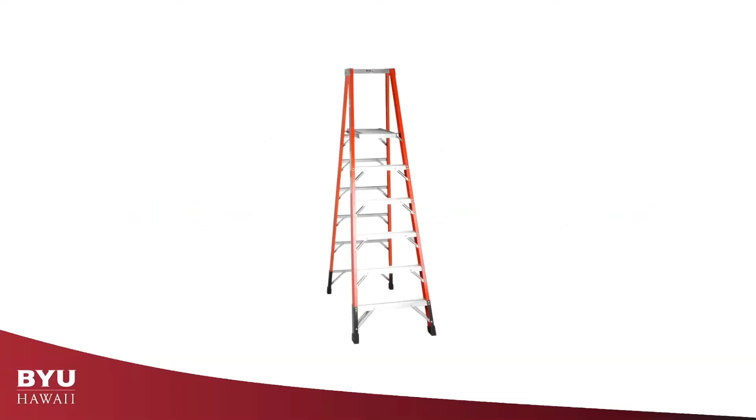So I'm going to start this with the question: what is the most dangerous tool at the workplace, whether you're in facilities or in construction? What is the most dangerous tool out there? I will show in the next slide what it is. Think about what you think it is. The most dangerous tool in facilities and construction is this: it is a ladder. Anytime you have somebody that has to go up and down a ladder on a roof to look at something, that's cause for problems. There's actually a push with OSHA to see if they could do away with most ladder use because of so many problems with the falls that happen.

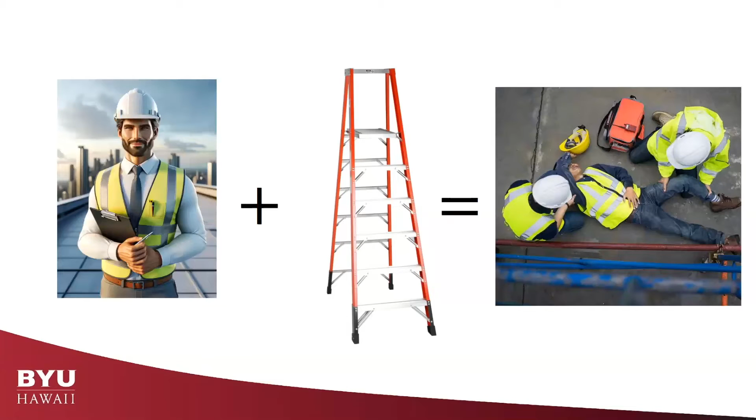So I put together this slide. That guy on the left is my AI inspector, facilities person. And just a side joke, I uploaded a picture of myself and said, draw a picture that looks like me as a building inspector. That is not how I look, by the way.

I don't look that good, but all right.

So from a safety perspective, this is from the Department of Labor: 38% of construction fatalities come from falls. When you fall from a roof, it's very likely to be fatal. Anything above 11 feet, and there's a good chance you could die from that. Just adding up the cost for a fall, you break a leg, you're looking at up to $60,000. We did some research on that - $60,000 for recovery, rehab, loss of work. And that's from one fall.

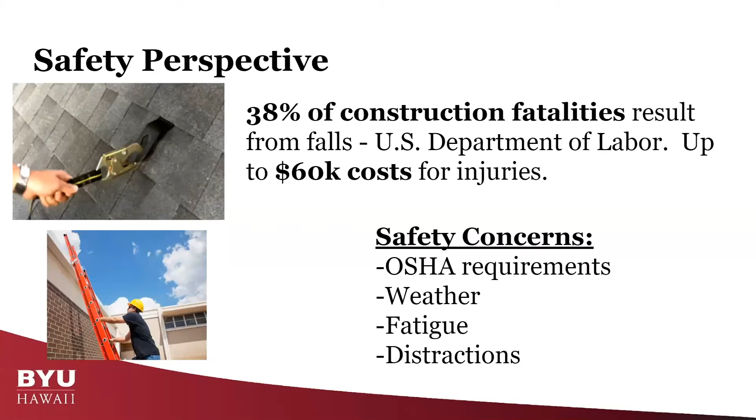So if nothing else, drone use is helpful to avoid falls. Other safety concerns are weather, fatigue, and distractions while you're climbing up and down, traversing a roof.

Let's see, some things I wanted to point out. Obviously safety is an issue - put down the numbers there for that. Another thing is time savings when you use drones. We did some research there too - what's the time savings versus going up yourself or sending someone up there?

You can document buildings better, your structures or your property. You can do it by date, by GPS tracking. Also, you can do maintenance planning with this. So I'm going to go through that.

Some of those points - let me just talk through getting started. I'm assuming that maybe you've never worked with this before, and I know several of you may have, but never worked before. I'm just going to walk you through some basics and then show you a bunch of different examples of how we've shown that it can be used.

Now, before I move further, I'm looking at the chat line. Let's see, checking here. Jake, I'm going to let you look through that. If there's any questions that need to come up, feel free. Yep, I'll keep an eye on it.

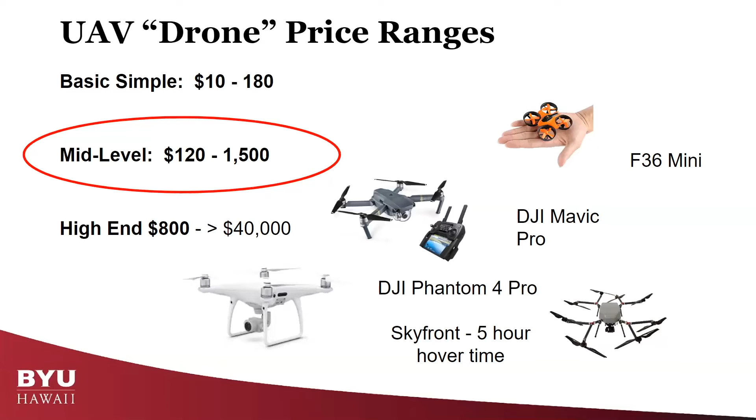Okay, great. So getting started though, price range for drones - you can go simple, mid-level, or high-end. What we recommend is about this range for most drone use in industry. I'd say stick closer to the $1,500 range. They've got great cameras, decent battery life. You can go higher end, these $800 to $40,000 drones, but if you're looking at expenses and you want something quality, you can get something decent for $1,500.

The FAA license - it is work, it takes some time. I put together a list of things that are on the typical test for it. It's about $170, almost $200 to take the test. And it's like a lot of other tests - they'll let you test 2 or 3 times off of the fee, but you do need to study. I tracked my own study research - 12 hours is what it took me. Basically I watched a bunch of YouTube videos over and over, people that walk you through the test questions.

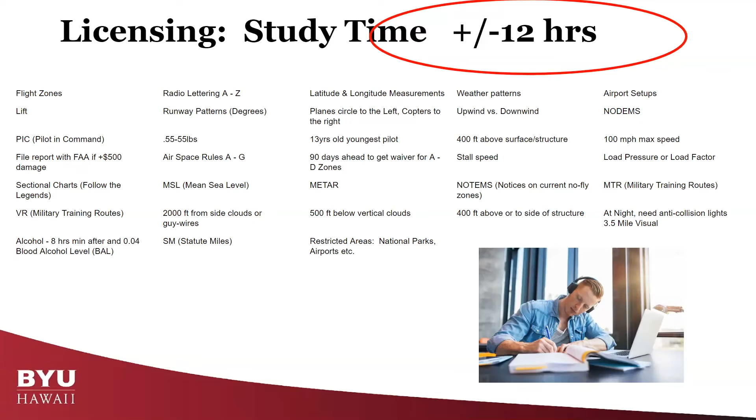Anything from the age to fly drones, learning about what NOTAMs are, stall speed, METARs - a lot of information. Alcohol and drones don't mix, things like that. A lot of information that may not be what you use day to day, but they do deal a lot with safety there. So that's just a quick list of the questions there. I'm sharing these slides with Jake so you can share those with people in the future.

If you get the license though, what does it do? It lets you fly commercially, charge money for it, or at the workplace. You understand the laws of safety, regulations, which is great. What it does not do - it does not make you a good pilot. Getting your license doesn't make, it's not like a driver's license where you have to prove yourself in driving a car. It just gives you a piece of paper. It does not teach you about industry software, things like that.

So let's move on. Now, if you're going to fly drones, you think you're going to jump into it - the key is practice, practice, practice. I'm going to go through some examples of how I practice.

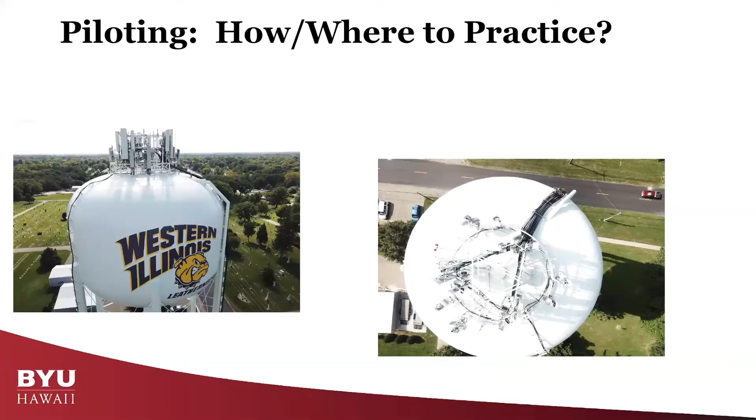Anyway, practice. This was our local water tower in the Midwest, Illinois. Got up, checked around, got close enough that I could check the welds on the tower. This obviously had a cell tower on it, and I was probably across the street, maybe 300 yards away.

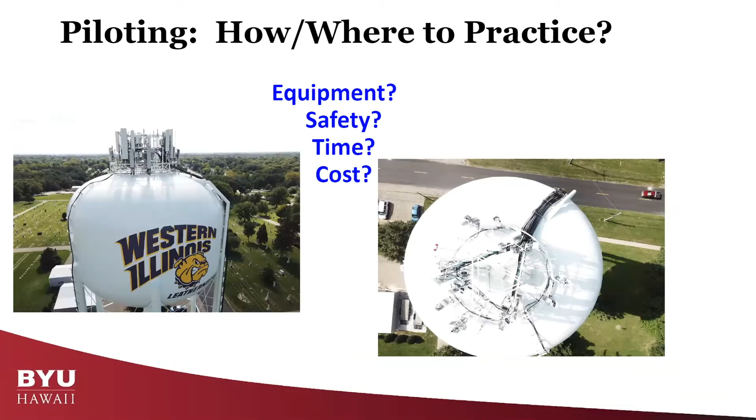But on these pictures I'm going to show you, I want you to consider what it would take in terms of equipment, safety, time, and cost to get these pictures without a drone. If you were to get up there with a helicopter or ladders, what would it take?

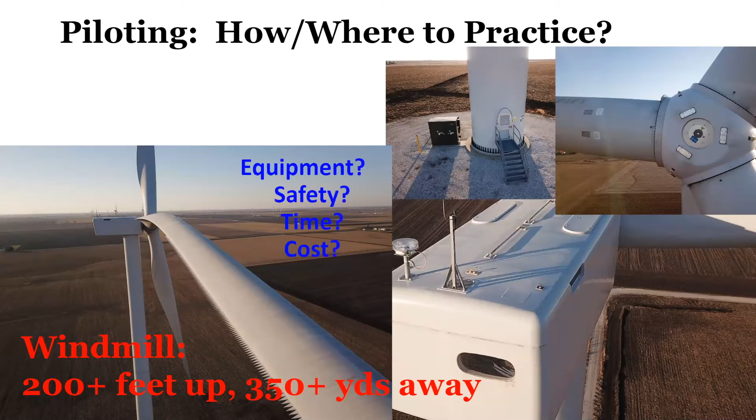But I was able to take this up in a few minutes, 350 yards away, take it up and bring it back to get pictures. Again, equipment, safety, time, cost - what does it take to get these inspected?

By the way, talking to that guy doing the inspections, he said that partway up some of these, his leg would start to cramp up, and then you get into trouble climbing that ladder.

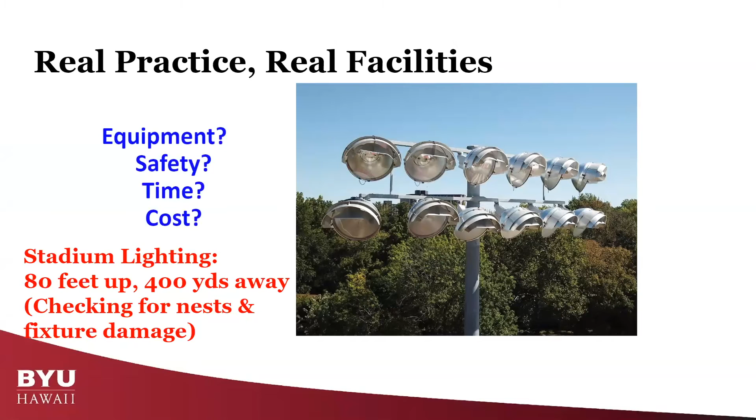Here's another example on campus, checking the stadium lights. In this case, I was just looking for nests, hornets nests, things like that - 400 yards away, 80 feet up, checking that. So again, how do you get these pictures or this inspection done

without compromising safety? One of the things I learned as I started moving along with drones is there are 4 main settings on any drone that you need to learn: focus, white balance, ISO, and shutter speed.

Really what you're just trying to do is make the pictures easy to see, so that when somebody puts it on their computer, they can see it clear. I came to Hawaii about 6 months ago, did a great drone inspection of the town I was in, took it back to Illinois, opened everything up, and it was all blurry.

So focus - make sure you get your focus right. White balance, ISO, and shutter speed - you can Google these, look them up, there are great trainings on them. They're just settings on your drone that you need to learn how to use.

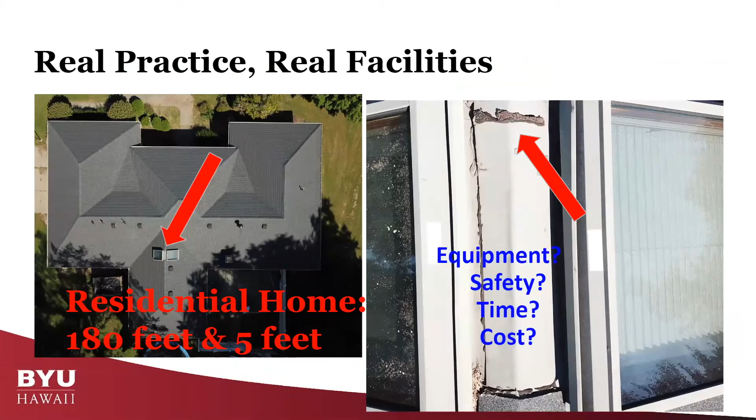Residential is an example - actually it was my house in Illinois, showing a close-up and a faraway picture. Again, what would it take to get these pictures inspected without the use of this technology?

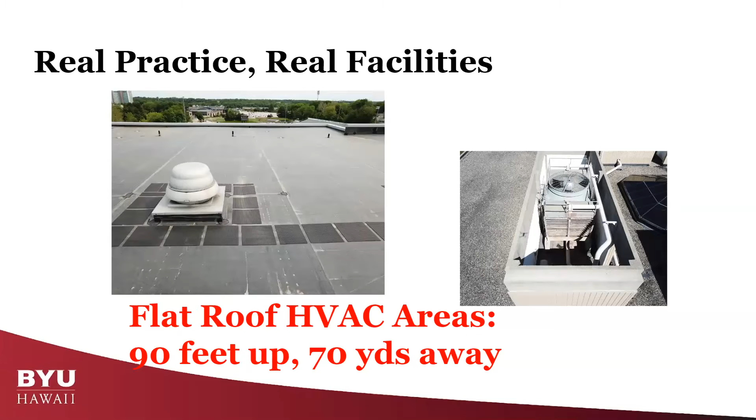Some of our buildings on campus, drones. The key thing we learned was you need to check any penetration, anything poking out, a parapet wall or vents. You need to get various angles of them to be able to show the condition.

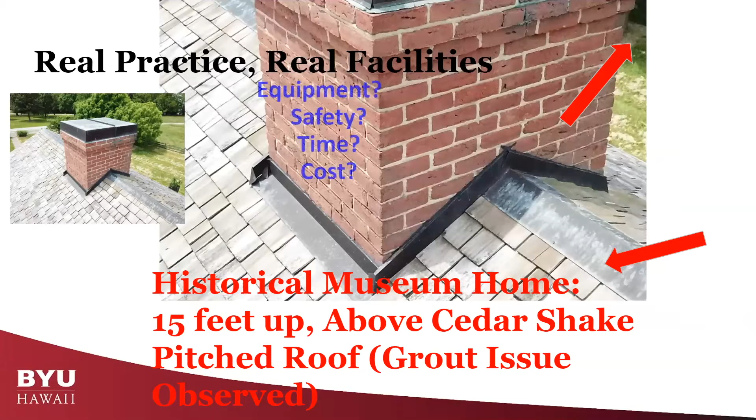Are there leaks? Are there cracks? This was another client we worked with - they had a lot of historic buildings. You can see these cedar shake roofs, checking for leaks, checking for damage or wear on them. This group had over 100 buildings like this. So what would it take to do that?

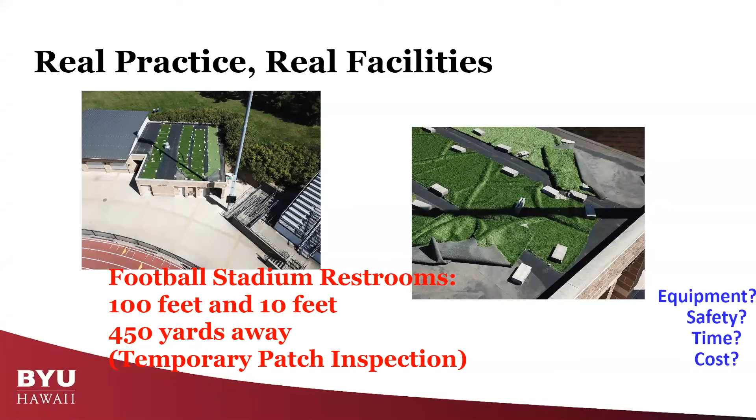So we developed several protocol steps. When you do any building, you make sure you get an overhead view, take a short video flying around it, and then get angular views, take an angle picture of all the penetrations, get as close as you can. Sometimes the client will say, hey, can you take a picture of this part? We have this one part of our roof got torn off, get some close-ups of that. We've got hornets here. So a lot of things that you do over and over. These are the steps we did with some research presentations on this.

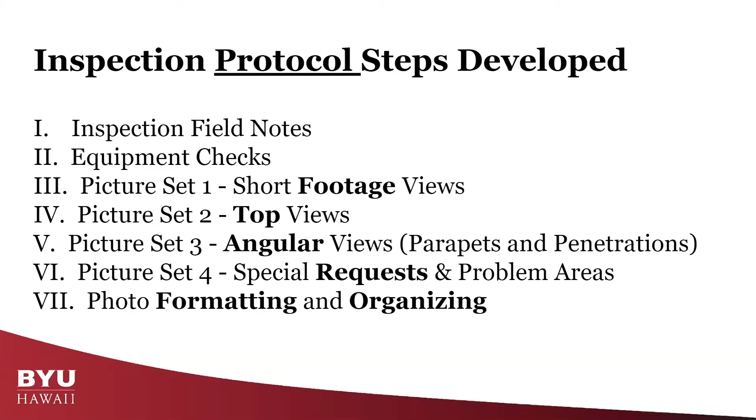And then step number 7, formatting. That is a big part of getting this all organized, keeping it organized so that you can view it later. That's done at your desk.

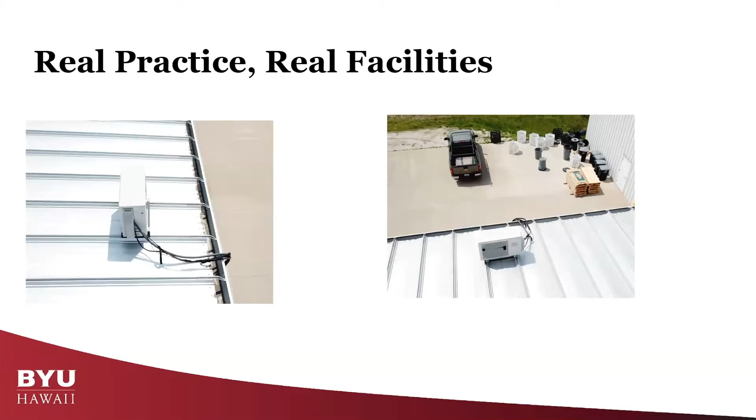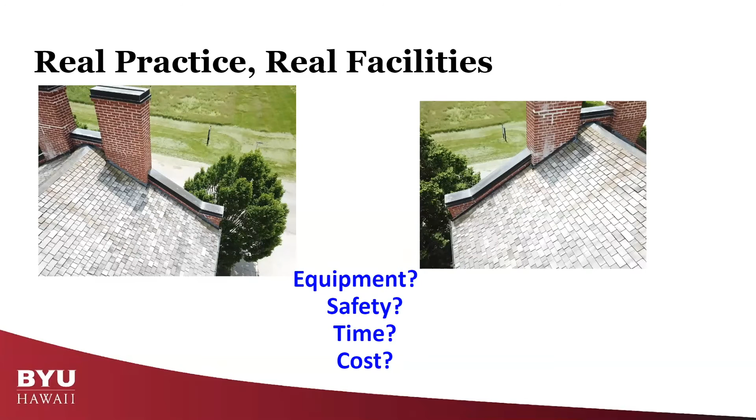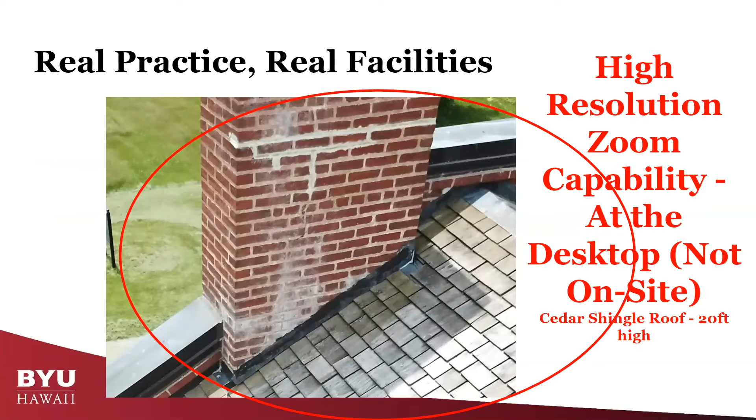So these are a couple more pictures. There's an AC unit on top of a roof, getting it's part of a roof inspection. So a few more pictures I'll show. This one just shows how close you can get. Take the picture from 40 feet away, but when you put it on your desktop, you can get it close enough so that you can see if there's any issues with the mortar, the grout, the flashing on the roof, the cedar shakes. So if you check in quality there, really nice opportunity to see these up close.

Each building, by the way, took us with setup and takedown about 10 to 15 minutes. So pretty quick. In one day, I could get 20 plus of these structures inspected following that protocol I talked about.

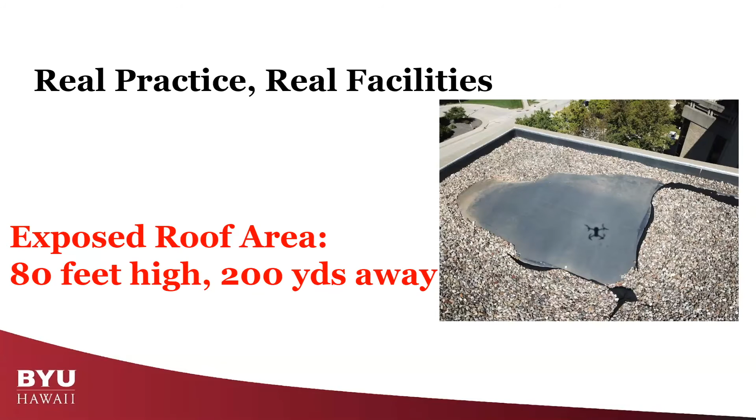Here's another example, our library. You can see one section, they looks like they did some work there and then forgot to rake back the rocks, which should have been covered back up.

This is another example, student housing. I'm using a lot of examples from our university. I had a pretty good relationship with our facilities person there. They had an issue with the student housing, the dorms, where about every spring, middle of spring, and then middle of fall, they have these bats and hornets that would just come out on the buildings. This is about a

15-story building. And so rather than doing some high-end angle pictures, all I did, hopefully you can see this all right, I flew the drone looking for holes or gaps in the roof. So took the drone, fly up, stop, fly up, stop.

What we found, it was hard to see from the ground, but let me pause right here. This is about the third or fourth floor up. Between the windows and the brick, we found that there was a gap, that the seal had broken or come separated. And so all along, third, fourth, fifth floor up, you have this gap that was coming through, and the bats and hornets, they'd go in there and just make their home in there, which caused all kinds of problems for the students.

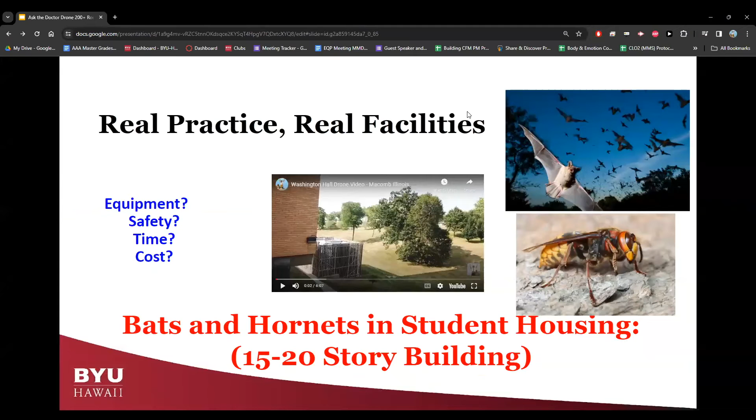So that was an example of helping to solve a problem. Let me get back up to here. And right there, okay, helping to solve a problem of what's going on, how are these hornets and bats getting in? Again, how would you get these pictures taken without some technology like this?

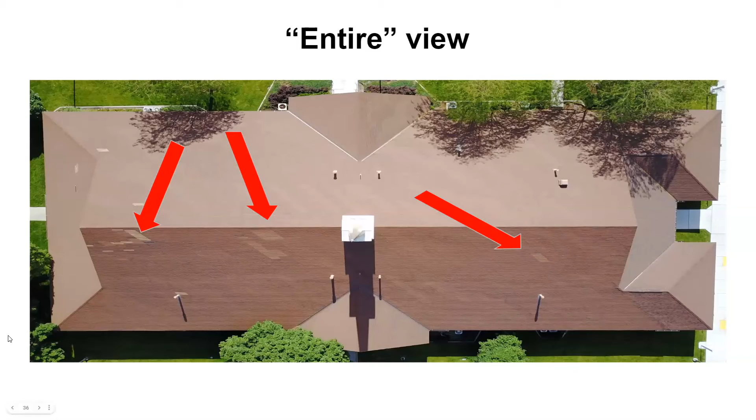Here's another example of a large building. In this case, it was a chapel. They're looking to re-roof, and they have to decide, is it time to re-roof or can we wait? You can see, obviously, with the drone pictures, this particular research was done by Dr. Bowen, one of the initiators on this work that I followed. You can see areas of the roof that are damaged, but they're not sure if it's time to re-roof. They get the drone out, take pictures of different sections of the roof.

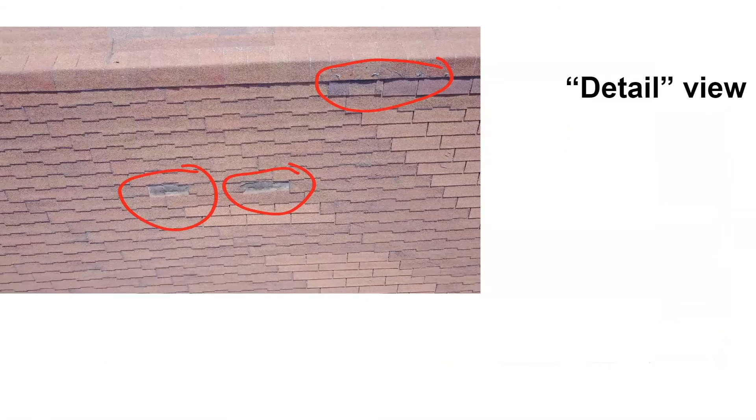Then they get up right close. They can see that there are some damaged shingles. Detail view, really close. This shows how close of a picture you can get, at least when you zoom it up with the drone. And what they decided was most of the roof is in good shape. Just these spots are causing problems.

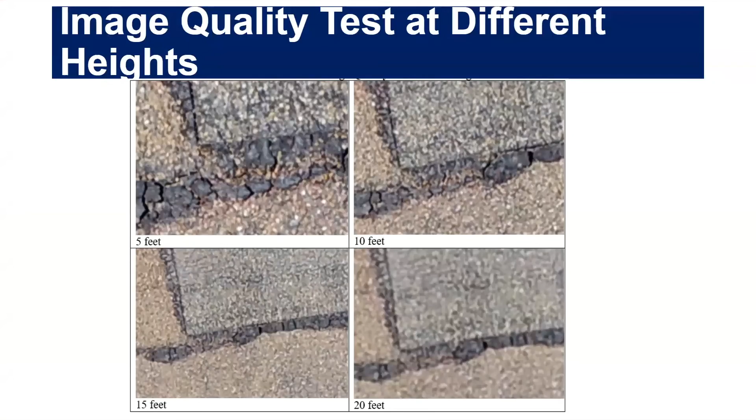Here's their analysis of how well, a quality of pictures you can get 15, 10, 5 feet away. But the point with all of this is they decided that we don't have to re-roof yet. We can just spot patch and put this on a maintenance schedule for 2-3 years away, because the roof is still in good shape, which saved quite a bit of money in terms of not having to do that work yet. Without the drone use, they would probably just walk it and sort of stumble across the top and then just say, yeah, let's just re-roof it.

My legs are sore from walking around here.

So that was an example of money saved. A couple more things I wanted to cover. One is, how do we organize all of these pictures?

We were able to get a close-up view, and put a link there that would take us straight to Google Drive. If you've used that before, it's basically a set of folders in an online space where you can put things. I put all the pictures there—this is the building shown in that other view.

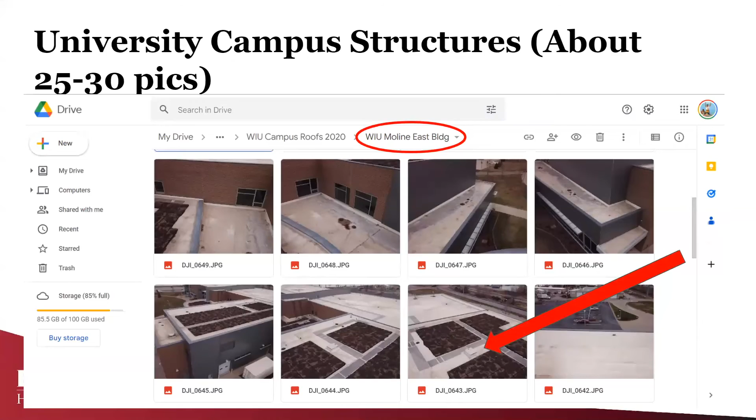We documented over 100 structures total, following the standard protocol: top views and angle views of everything. You can see how close you can get, for instance, in this case a hatch door on one of the structures. We handed the information over to the facilities person, so they now have a documented version of their roofs for that year.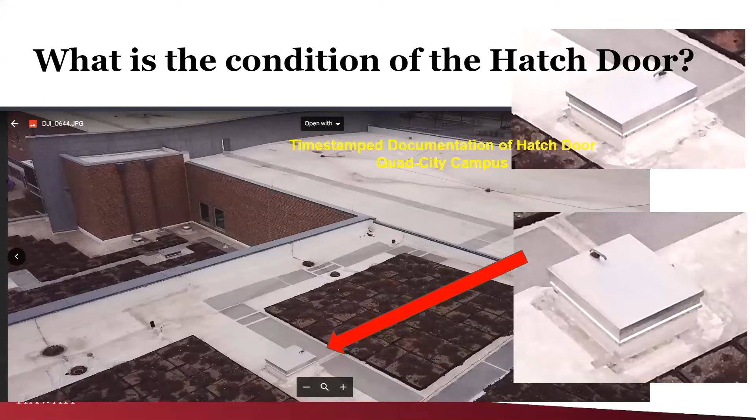Just to give you an idea of how many, this is our other campus—all of the buildings that we documented. Each one has a link and pictures that follow the protocol, so they could just click on it and say, okay, these are from this particular year. I think it was 2020 when we did this, right during COVID actually, which was a great time to fly a drone outdoors.

Each building has a link, and the pictures are all in there too. This was great work—I used it for my sabbatical, that was my semester there.

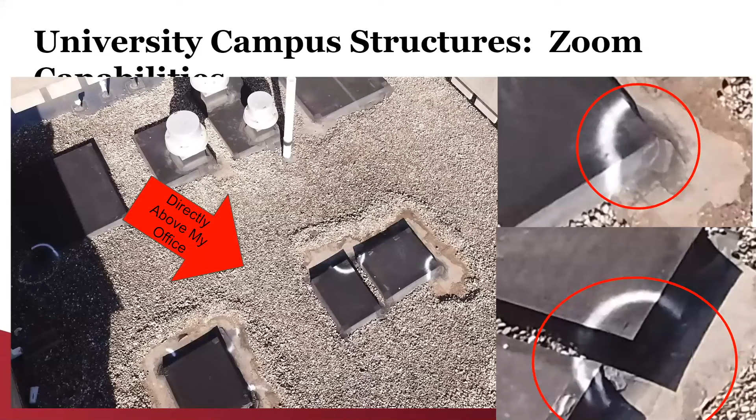I'll just show this one—it was right above my office, and let me tell you, my office leaked water. So I could show them up close: hey, it looks like you're leaking right there. They did re-roof about a year or two later.

That was nice. Okay, I want to end on thermal imaging—this is what we got into towards the end. It's a different drone. Your standard drone we use, the DJI Mavic Pro, was about $1,500. But this higher-end one is called the DJI Mavic Enterprise, and there are a couple of different other versions of it.

What it does is take two different pictures: one normal, and one thermal image. In this video on the left, I'm not going to show it, but just so you see the picture—they take a surface below, like an OSB plywood piece, draw the word 'wet' on it with water, then cover it with standard black rubber roof material. They shine a light on it, let it heat up, then take the light off. The water underneath the roof heats and cools at a different rate, so you can see it with a thermal camera.

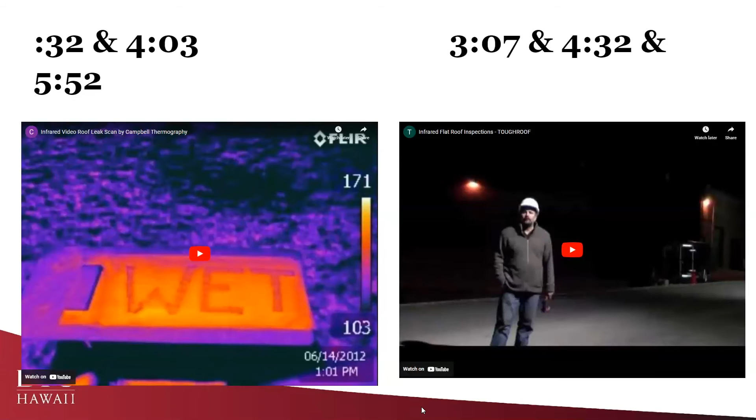With that, I'll jump to the next slide. This is an example of what we did with our thermal camera at a daycare center. On the left, it was in the fall—the sun was setting, so the roof was heated up but cooling. On the surface it looks dry, you can't tell any leaks, but on the right side is the same picture with a thermal image on it, showing how much moisture is underneath the rubber top.

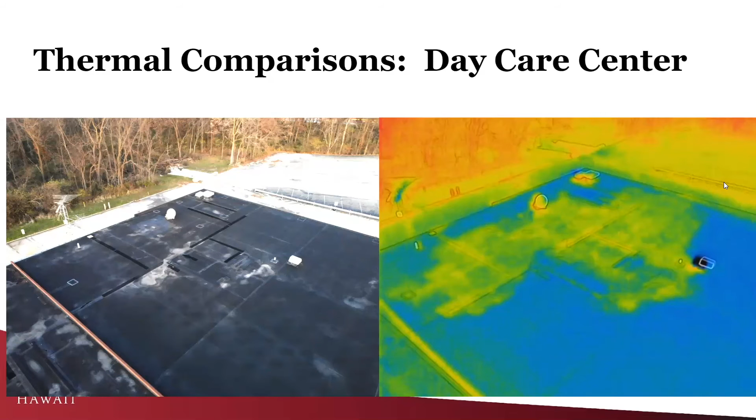This was a pretty solid example showing you've got water damage underneath your rubber roof. It didn't mean it was leaking yet, but it showed the area was deteriorating. We did that for about a couple dozen buildings on campus, showing them which buildings to look at for their maintenance schedule. Another example: on campus they had a steam line leak, losing material used for heating campus buildings—underground steam lines all over the place.

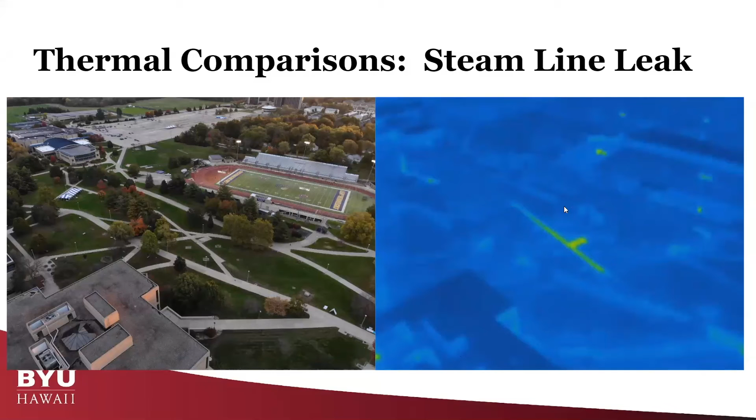Left side is a picture. This was an early morning shot, and what I'm looking for is any steam or heat signatures showing where the steam lines are. They did not know where the leak was, so my job was to just take pictures and video of the area to show them, okay, these look like hot spots. In this case, you can see that sidewalk there is a hot spot. Doesn't necessarily mean there's an issue or problem there, but it shows them that this is an area you may want to look at, in that sidewalk area.

Steam lines were probably 4 feet underground, so you could see where these signatures show up. And I flew across and showed several hot spots on campus.

One other one, residential, that we did this summer - the housing group asked us to see if we could find leaks. They had an irrigation water line running through here, and it seemed like they were losing a lot of water. They felt like there was a leak underground with their irrigation water lines. So we went through early morning one time and took these pictures.

Left side is the homes, the right side is the heat signature scans. And in this case, we were looking for cold areas, dark pictures. We did not necessarily solve the problem for them, but we did show them this is the data that we're finding, and you can make an assessment from that, and see where you might want to check around if there are leaks or muddy ground areas.

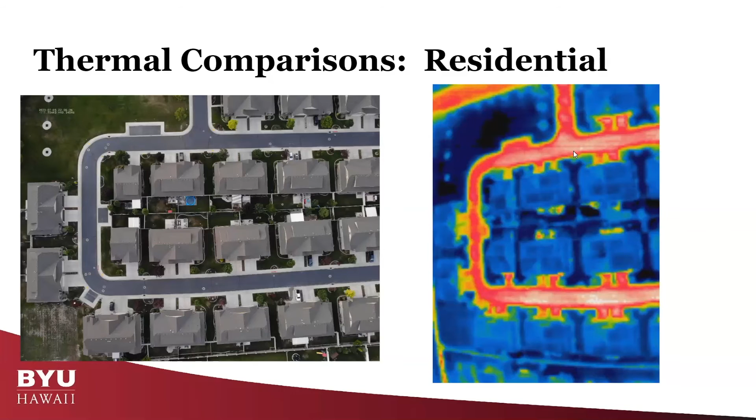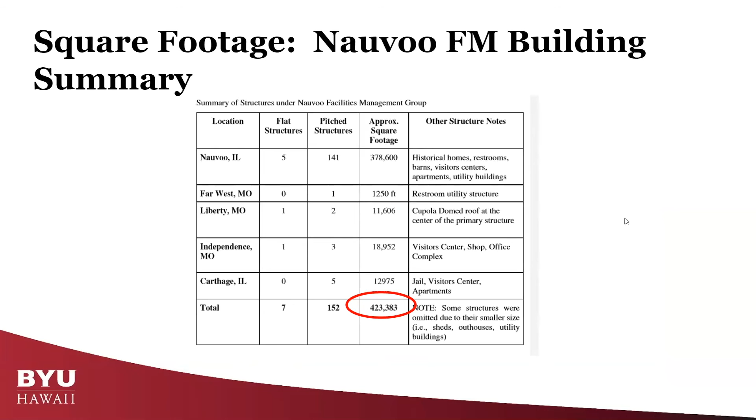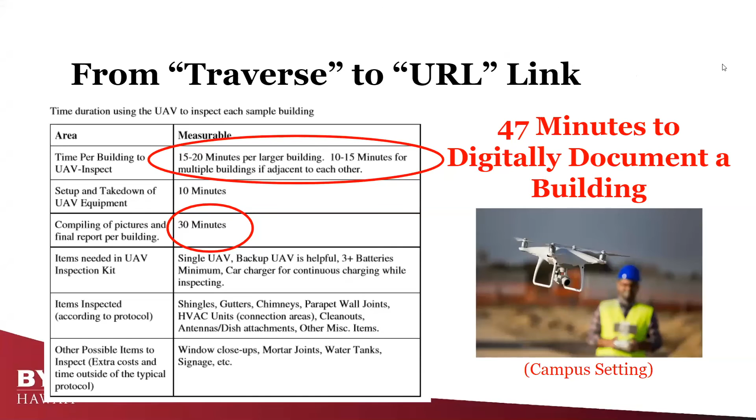What we found was each building took about 15 minutes to do setup, takedown, and then actually doing the inspection. But it took another 30 minutes of compiling the pictures, organizing them, uploading them to Google Docs, and handing over the information. So that gave us the number 47 minutes to digitally document a building - that's everything from start to finish.

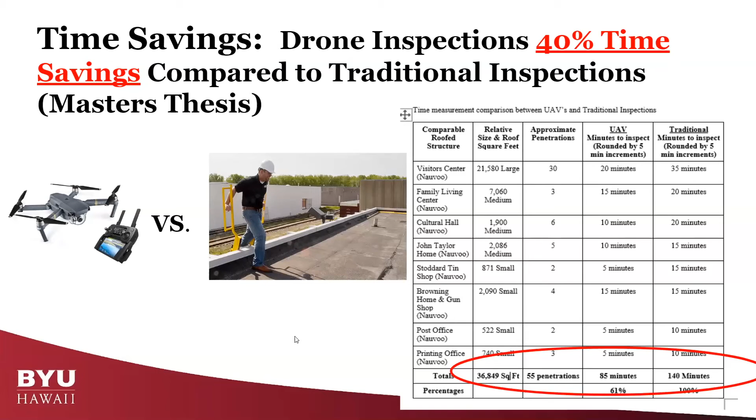We also found some of the sub data that went with that. We also found that he saved 40% of time doing the inspections with a drone once somebody was trained. So that was a big deal here. And then there's a safety issue - so time and safety, big selling point.

Backing up your data, it's important to make 2 or 3 copies of it. We used thumb drives, jump drives, external drives, and then your actual computer. And then we'd upload it to, in this case, Google Drive, all the way through - that was part of the process. At that point, the owner would have a copy of all of that year's roof inspection information.

Okay, so some last things. $10 for a thumb drive gave you all of your roof inspections - it's very inexpensive. And then just setting up the drone itself, $1,500. And then I think another slide I did not put in here, it was another $1,000 to $1,500 in time for an employee to do the studying, take the test, things like that.

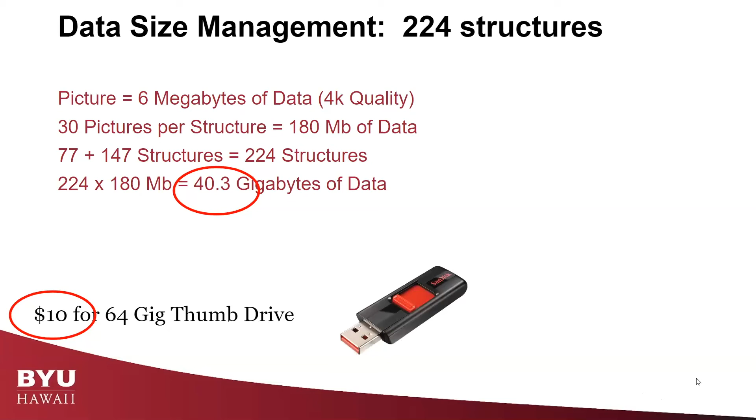So very inexpensive overall. Here's a comparison of if you were to do it in-house or contract it out to somebody else. The savings there - basically a month to do these 224 structures, as compared to if you outsource it, it might cost you $18,000 to $22,000 there. So it's giving a facilities manager a set of numbers that show, yes, this looks like it could work. You just need to invest in getting someone trained, or at least getting a good contractor to do the work for you.

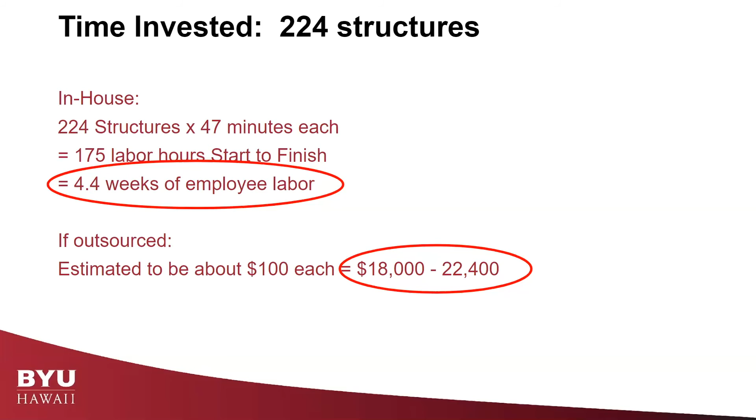That's an awesome picture, Brian. Thank you.

Well, thanks. I mean, that's super insightful.